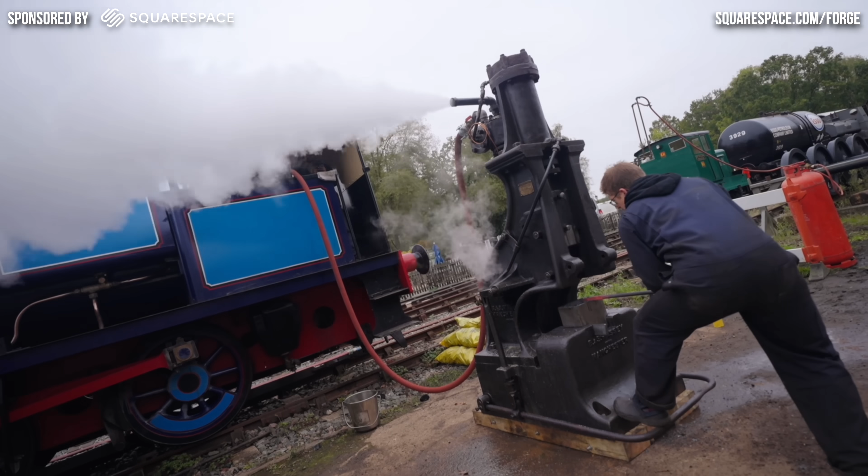It is fabulous to have you here because we're restoring my 1915 Massey power hammer, and in the last episode, absolutely nothing went to plan. We decided that the head that was screwed onto our piston absolutely needed replacing, so I took a big old chunk of metal and made a brand new one to replace it.

We can't install it straight away because there is half a threaded hole on both sides of our piston rod that we will never be able to match up with the correct location on our piston head, so these holes need to be filled up with weld and turned back down, so welding.

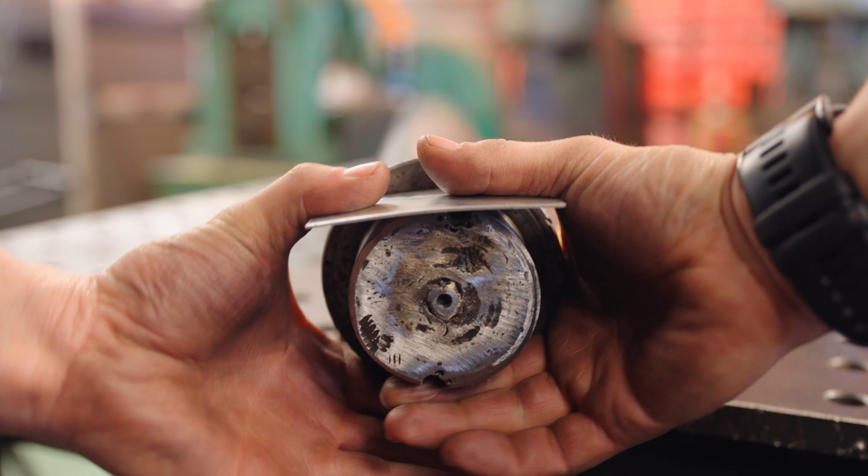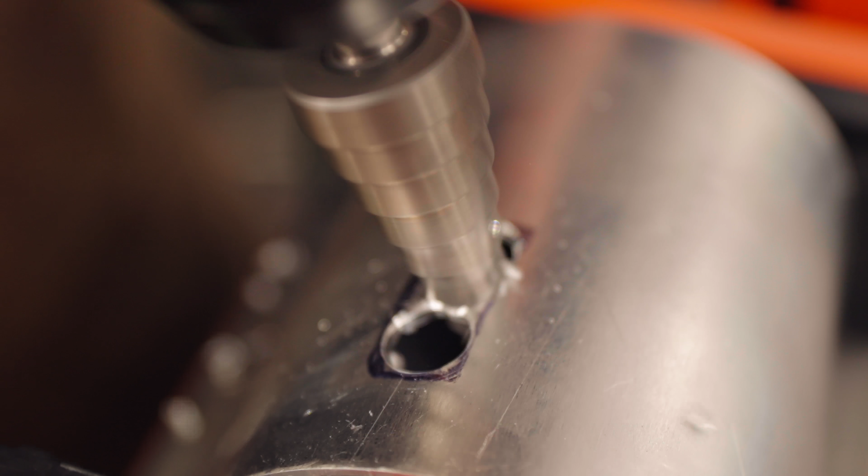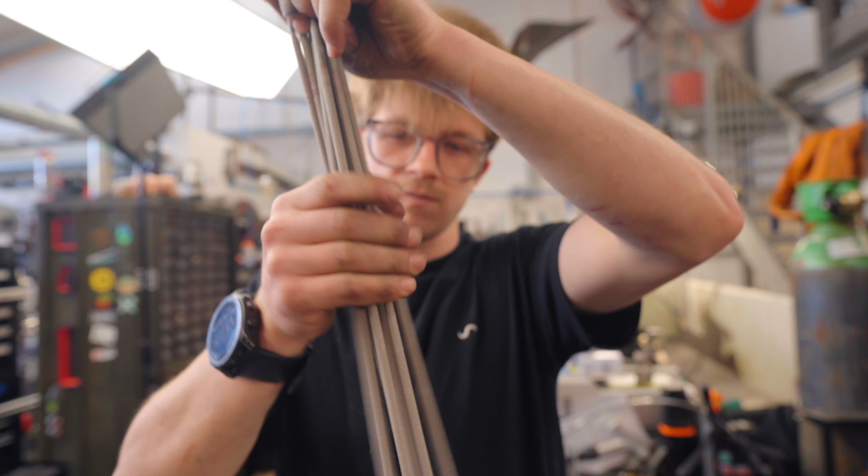Yeah. It's like cooking spaghetti. You gotta prep the rods first. Yeah, you gotta prep the rods. Check on these rods. Good. Man, I like them al dente, but they look a bit stiff. You think they need more time? Been a minute. Do you think we're going to need to tell people that we didn't actually boil the 7018 rods?

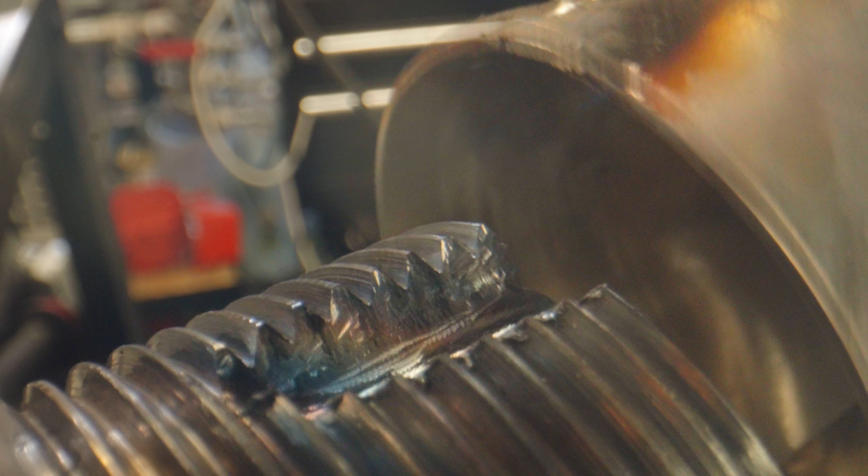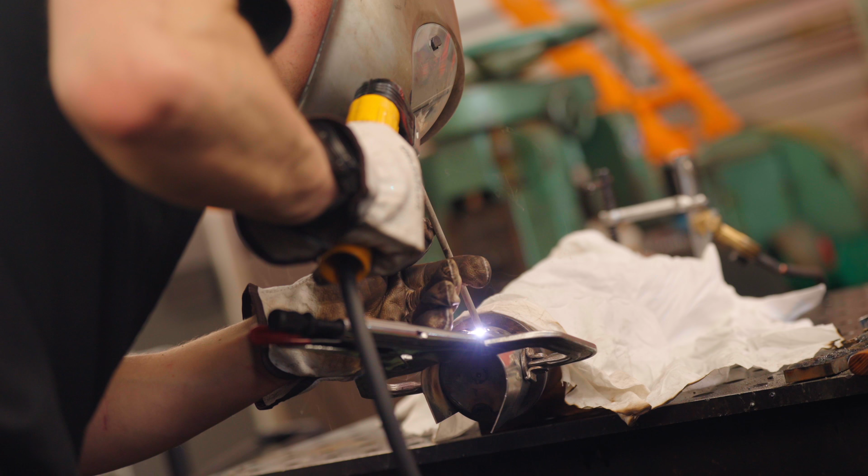So I did all that weld build-up with some 7018 rod. 7018 rod is a rod that's quite susceptible to there being any moisture, so I made sure to bake the moisture out of it, and I made sure to preheat the part to 200 degrees Celsius. We clean it out nice and good with the die grinder. A little bead at a time, peening in between is supposedly the way to avoid some cracking, and what I'm doing now is I'm effectively trying to make it cool down really slowly on the inside of the forge.

One of my big concerns about doing this is we're putting heat into a part that may have a lot of stresses in it, which may mean that we end up with a warped piston, which would be really unfortunate. I tried to keep the heat kind of localized to this far end there. If I come out of this day with a bent rod, I'm gonna be really upset. Hot out the oven.

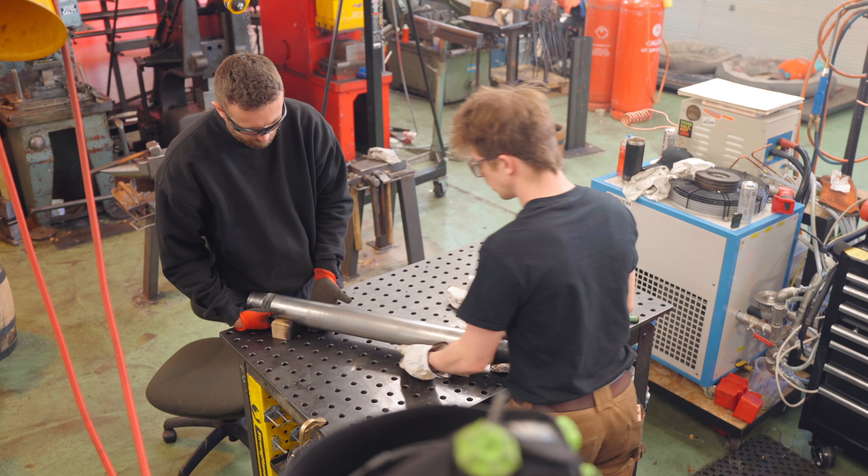That's the maximum depth it'll go. I think this is gonna be the biggest shaft I've ever had to deal with in the lathe. It's a good job you said in the lathe. Oh yeah, no, this is nothing otherwise.

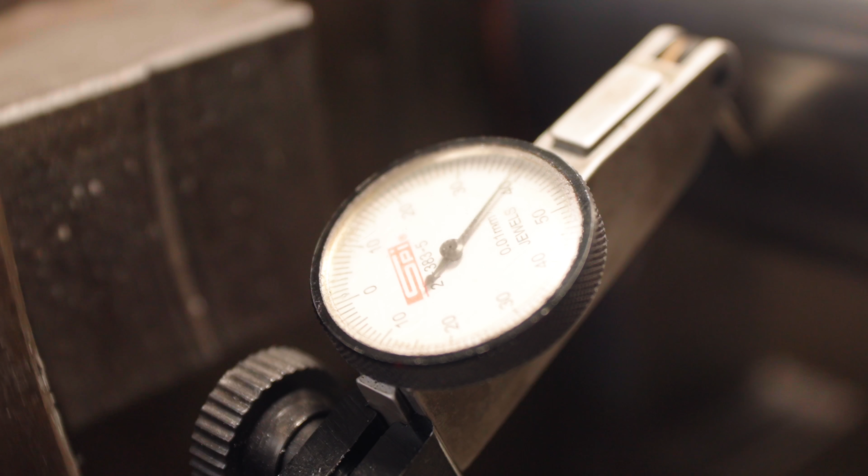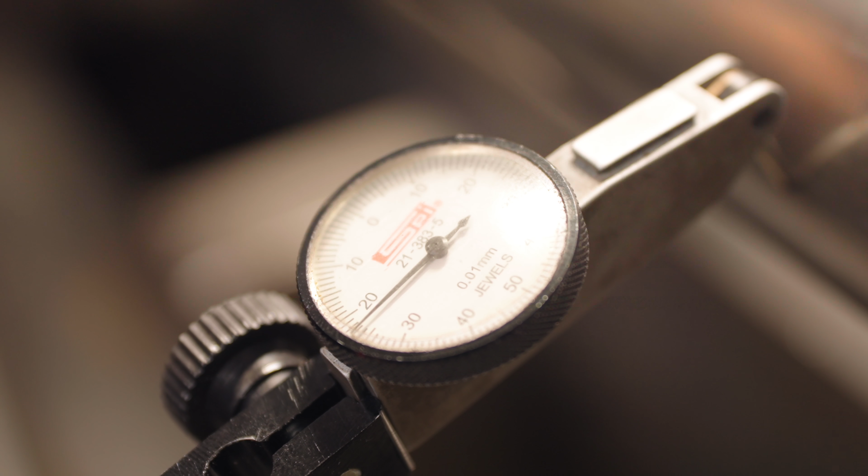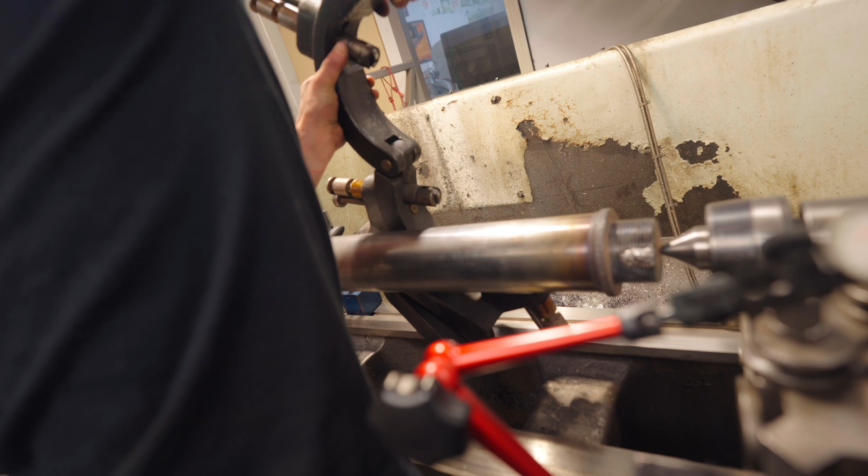Looks pretty good to me. That's pretty nice. Spin it to 50. Now we'll see how that dial moves as we come up. You will see we're obviously not straight by 0.25 of a millimeter. Time to get the big dog out, is it? You know, yeah. What? Oh, Tabby! I really need to put a crane above this lathe. Oh, we're within 0.02 of a millimeter. Let's do this.

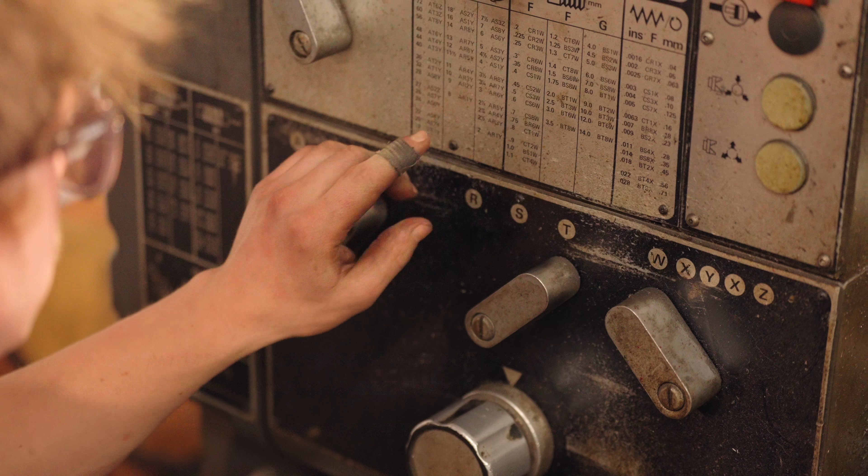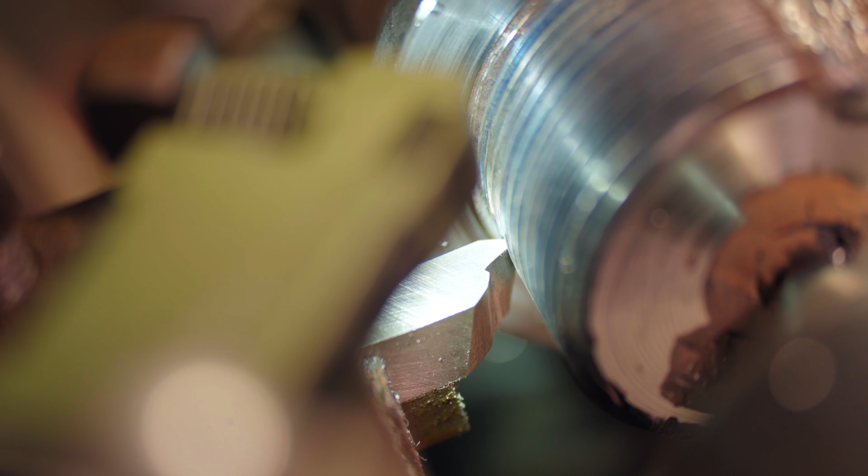There we go. I'm now connected to the lead screw. What we now have to do is get the tool to slot into that groove perfectly. I feed across until we are in the groove proper. Gotta be very careful so I don't crash, because I have to stop this carriage perfectly there. There we go. Now we're getting the technique.

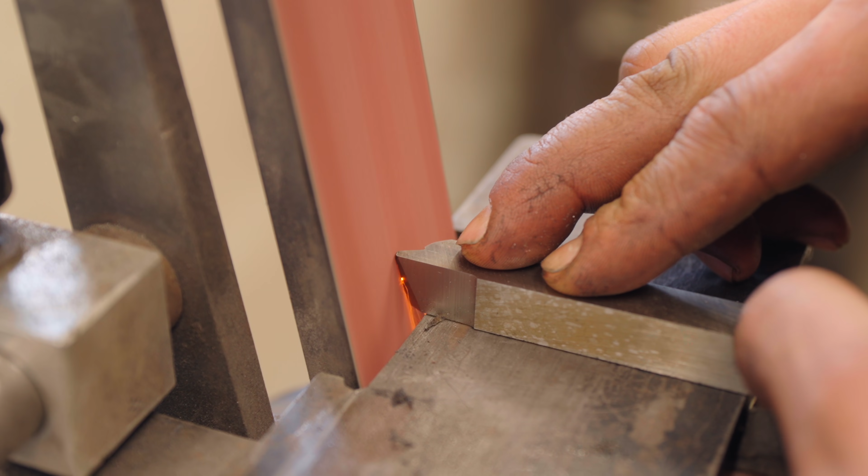We now have a thread cutting tool. We're back in business, boys and girls. Woo, we're cutting now. Broke the tool again. I felt that I was not quite engaged on the lead screw, and so I then bailed. But I think we might be able to try a test fit, so it's perfect timing.

As you can see, that's our welded area that now has threads in it. Yippee! It's now the moment of truth. Will this thread on our repair? And will it go? Oh, yes! Go on. That, with a little more leverage, is gonna seat all the way. High five! Next up, degrease, clean, Loctite, thread it on tightly.

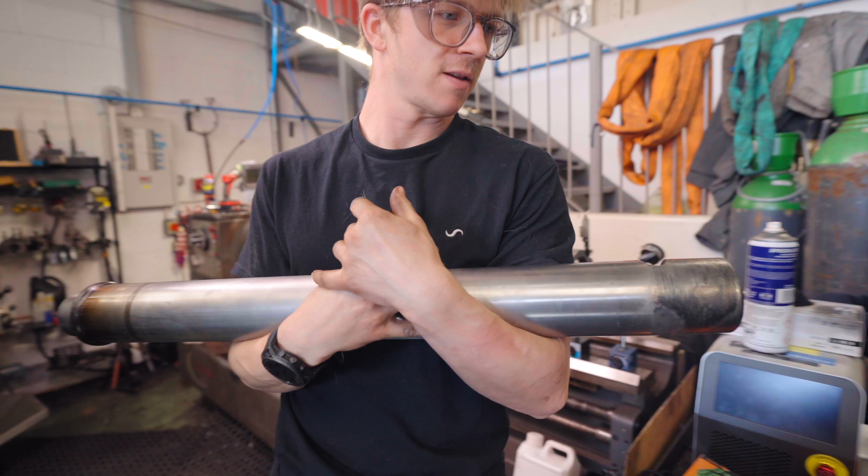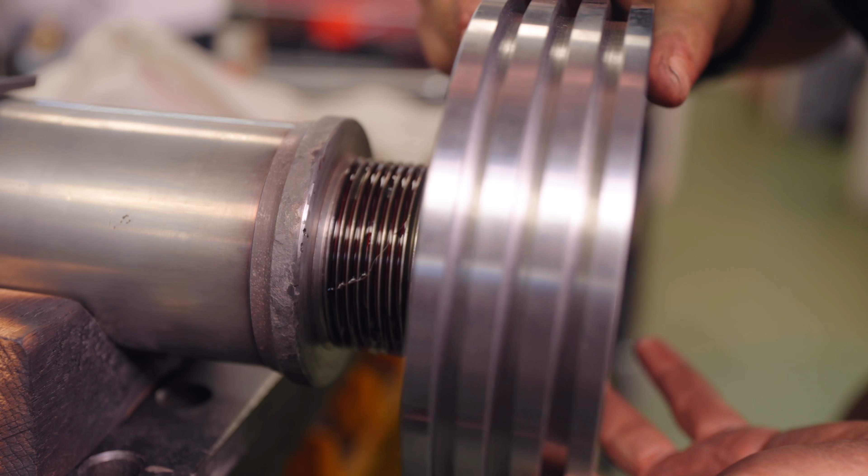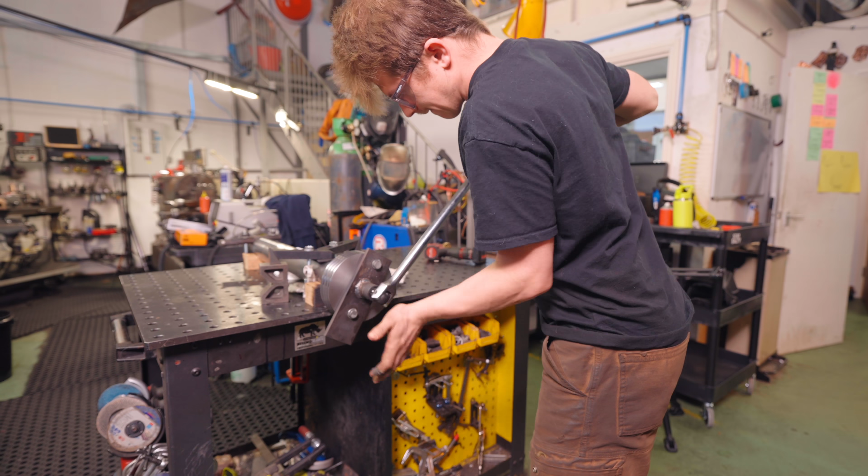Oh my goodness, look what we've done to this plate. We put so much torque on it that we have completely bent that half-inch plate that was firmly bolted to the face. I think we can just about say we've got that as tight as it's gonna go.

Oh, that's why. It's because we were threading it on so far that this was bowing, coming out proud of it. Great news, apart from the fact that it could be that we haven't threaded it as far as it needs to go because we are now running into a little clearance issue. Technically, that's now an interference issue where the end of that piston rod is now hitting our twisty bit.

So what I think I'm gonna do is whack this whole assembly back in the lathe and then face down the end of this rod. It needs to be flush anyway, so that we can hopefully get a little bit more twisting. Obviously, we could make a modification to this, but I know for certain that I do not want this thing to be proud, and so I'm gonna go this route, chuck it in the lathe.

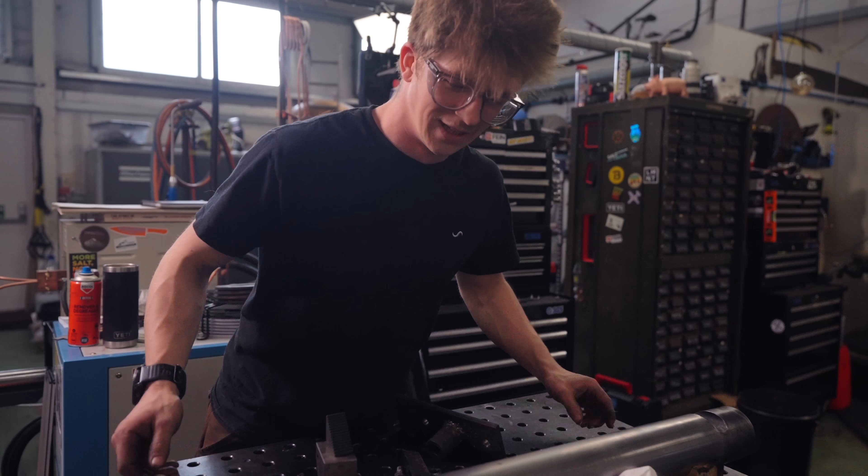But we gotta be quick, because I don't know how long it's gonna be until that Loctite is fully set up. Okay, we just Googled it. Apparently, red Loctite sets in like 10 to 20 minutes. So, oh, for goodness sake, gotta be quick.

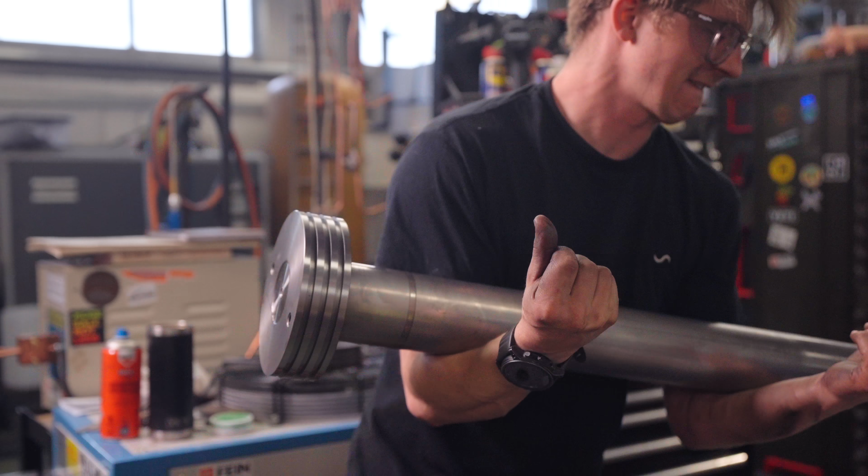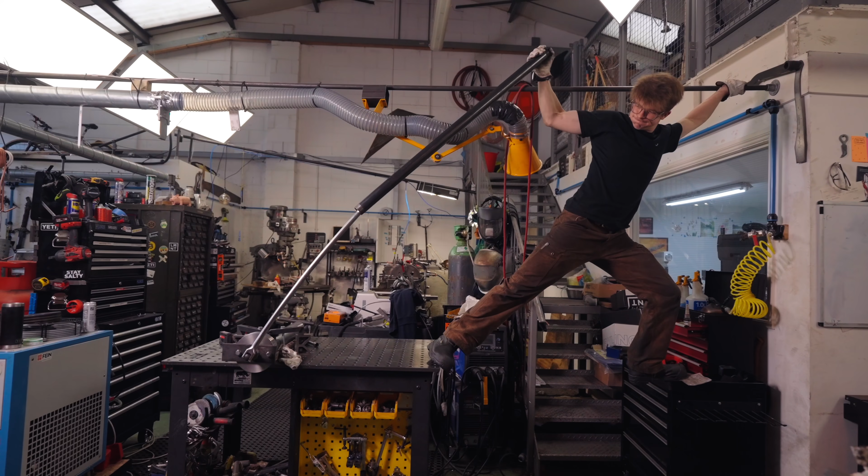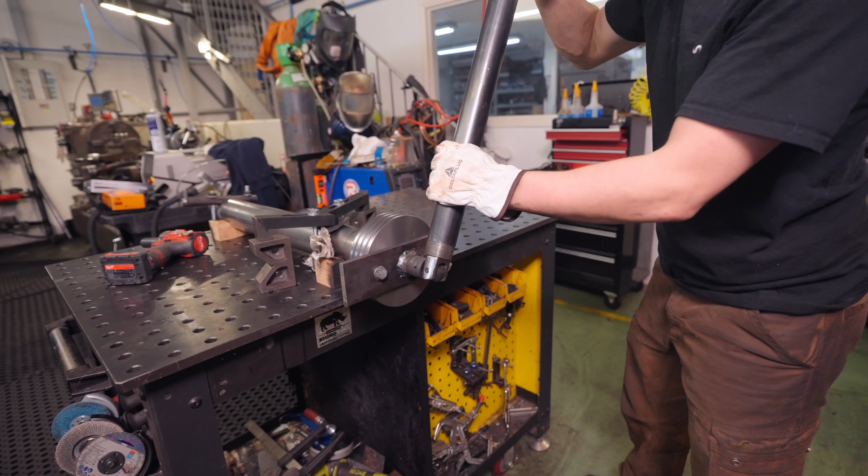I'm begging this thing to not twist. Good, that's promising. Good. There wasn't a rush getting it back into the lathe because we had it as torqued as it can properly be torqued, or the Loctite already set. Anyway, I was about to say this component is done. Oh no, can of worms goes deeper, doesn't it? We cannot forget about the most important part.

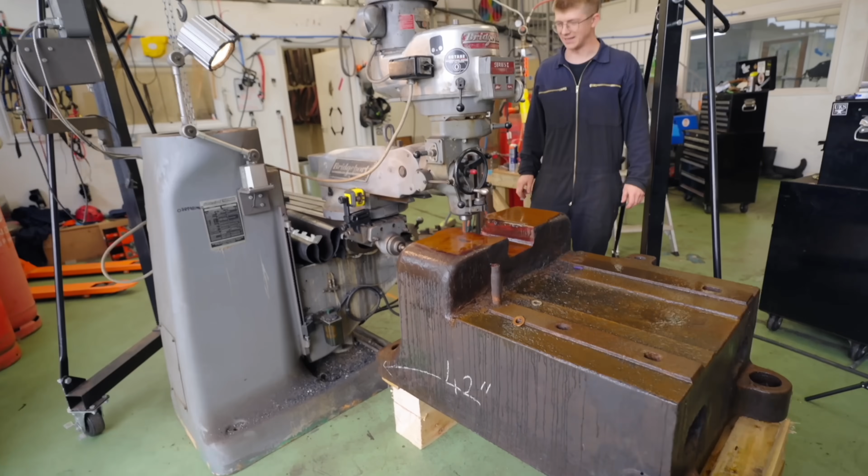Right here is where we welded. We need a locking grub screw tapped and threaded halfway on the shaft, halfway on the piston head. Question is, how on earth are we gonna bloomin' do that? Because that is not gonna fit in the mill without doing some real funky stuff. Not that I'm opposed to doing some funky stuff, but the clock is ever ticking. This hammer's gotta get back together, but it's gotta get back together right.

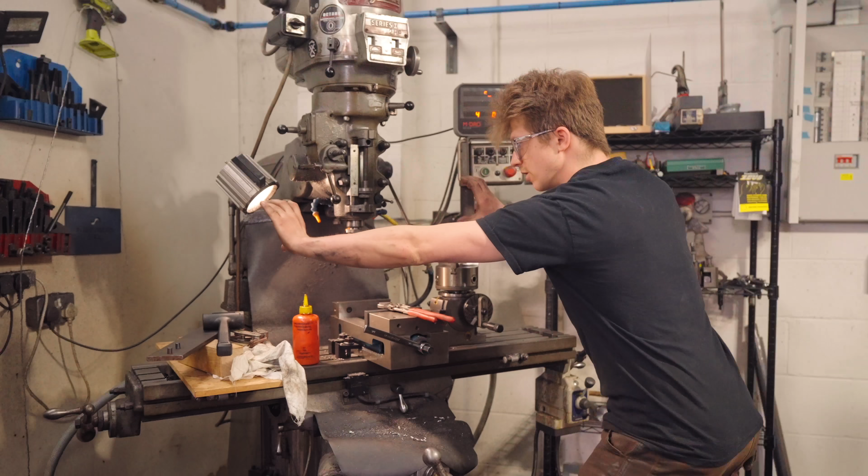Well, option one, we take a hand drill. The trouble with this is we're trying to drill a hole in the middle of two bits of metal that have different hardness. I think there's a good chance that the drill's gonna go off course, and we also know just how straight I can drill a hole is not very. Option two, we can mount that shaft to the side of my Bridgeport table and twist the head around. Option three, we can twist the head of the Bridgeport 90 degrees sideways, mount the shaft horizontally, drill the hole there. Option four, however, what about a mag drill?

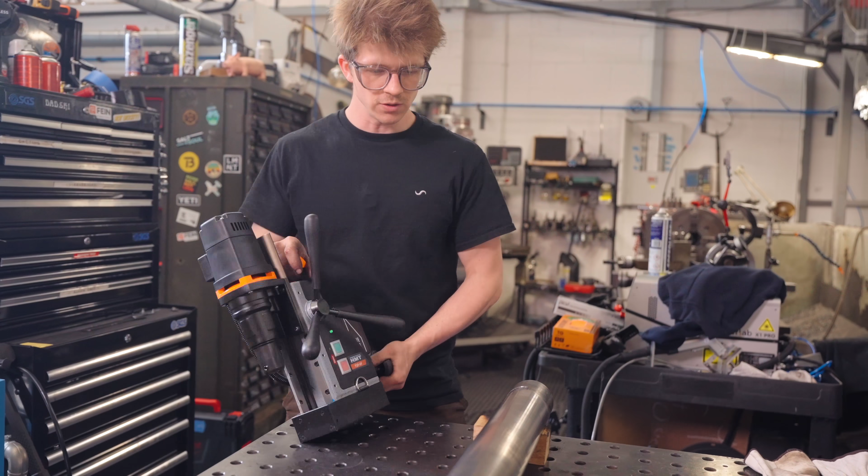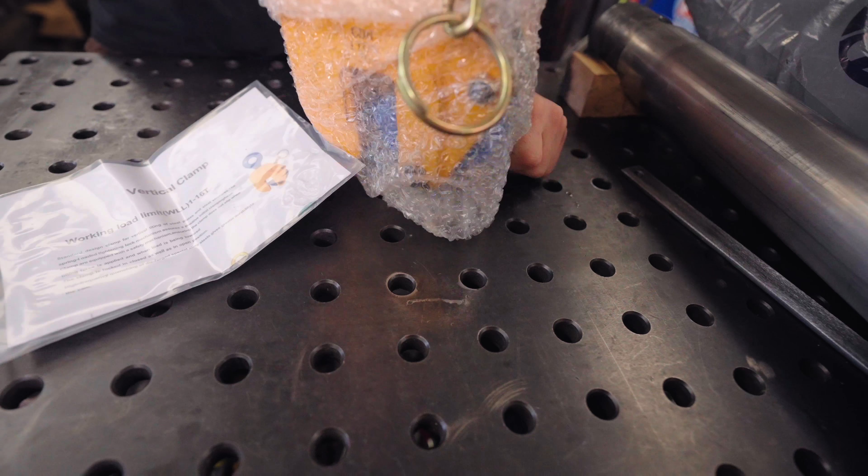And now for another installment of What Has Alec Received in the Mail? Oh, bloody hell. That's a lot bigger than it looked in the pictures. What? That is a plate-holding lifting clamp. Now that we've got a forklift, got to add to the collection. Good to have some of these fellas in stock. Oh, I know what this is. Wow. Ta-da! One Royal Navy battle ensign added to the workshop. What a delightful gift. Thank you so much.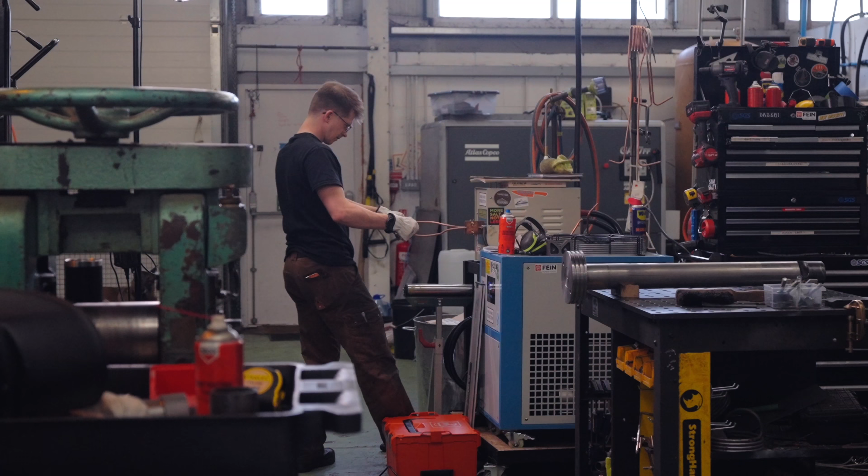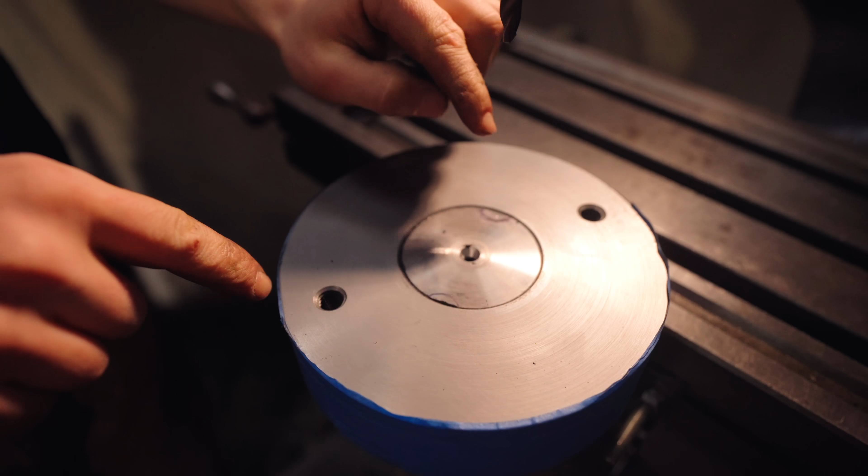So I did a little bit of research about what it is that we're doing, and it turns out this is called a Dutchman, where we are going to use either a pin, or in our case, a grub screw, to act as a mechanical key, stopping the two things from rotating. And it seems like it's quite a common thing to do, actually. Now, on the original part, I obviously had two of them, each 180 degrees from the other. I've decided that in this case, I'm actually only gonna do one.

The reason being, the most important threads in this whole assembly are the threads between the piston rod and the piston head, or the flange. And if I'm putting two Dutchmans in there, I'm going to be doubling the boring away of those threads and the critical friction that they provide. And it means that no matter what, if something bad happens and it comes unthreaded, I have to do a weld repair to be able to make it functional again.

However, if I do just one, it's not like the forces are ever going to be such that it shears a single Dutchman. But too, I've got the opportunity to drill another one in the future if it needs it. Say, for example, with the vibrations, it all of a sudden wants to twist on even more one day. And yeah, that's the reasoning I've got. Don't know if that makes sense. Here we go.

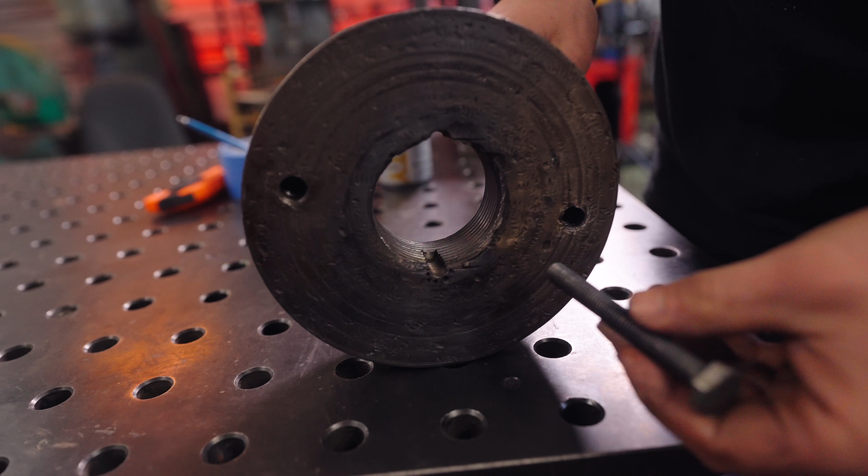There we go. The original Dutchman had an M10 thread in it. We're going to do an M12. The fact that this is threaded to M10 here does actually tell you that that was likely a repair as compared to an original feature of the original part. Remember, hammer built in 1915, all the threads are going to be Whitworth threads. If you find something metric, it's not original.

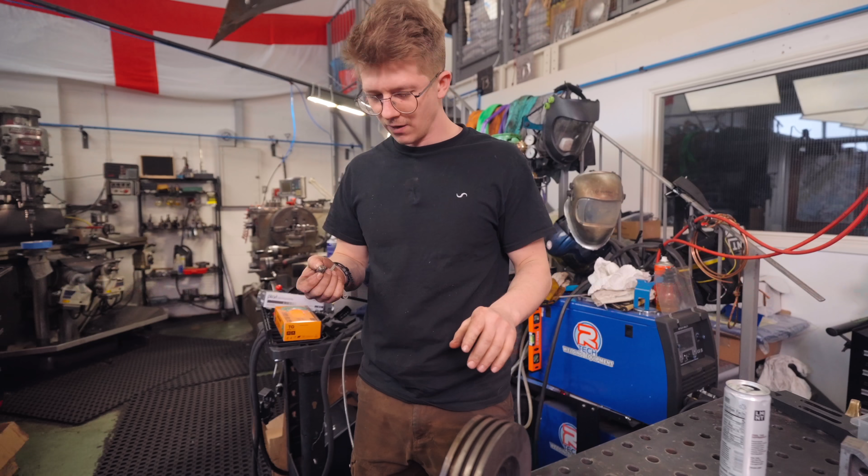On that note, I thought I'd dig out the grub screws that we found rattling around the hammer. Remember these delightful components too. Oh, actually, this is actually quite funny. So some of you guys in the comments had a suggestion that these bits we found rattling around the hammer may have been something like those.

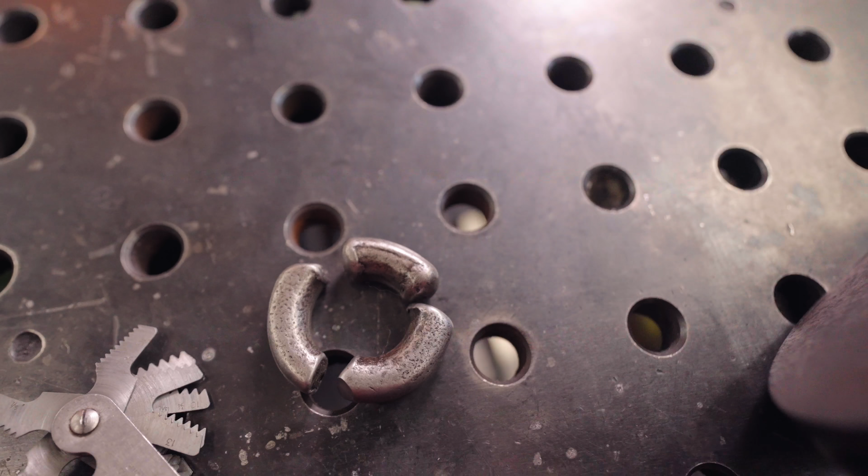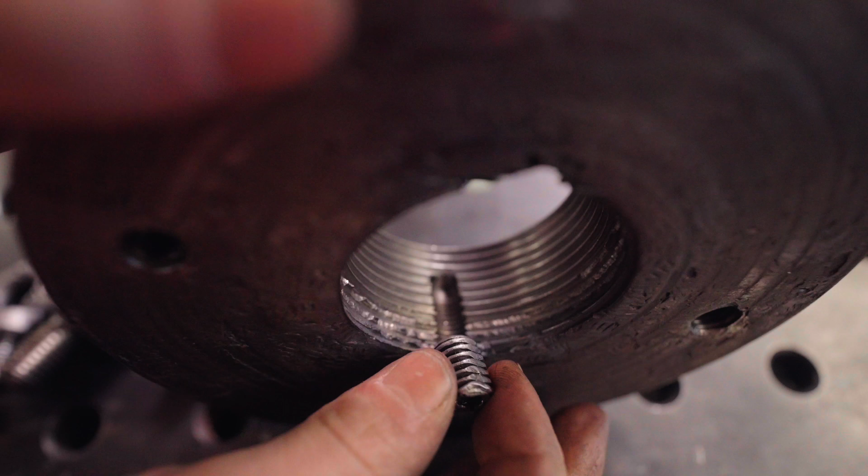A lifting eye that somebody may have threaded into these holes to install the ram and then turned the machine on without removing it, thus breaking these parts. I was just commenting to myself about the fact that this grub screw didn't at all look like the same grub screw as would have been part of the Dutchman, because it's way larger. But what if that grub screw was in fact threaded into there and was in fact the thread of the lifting eye that got broken? Great industrial detective work, mystery solved. Back to our Dutchmans.

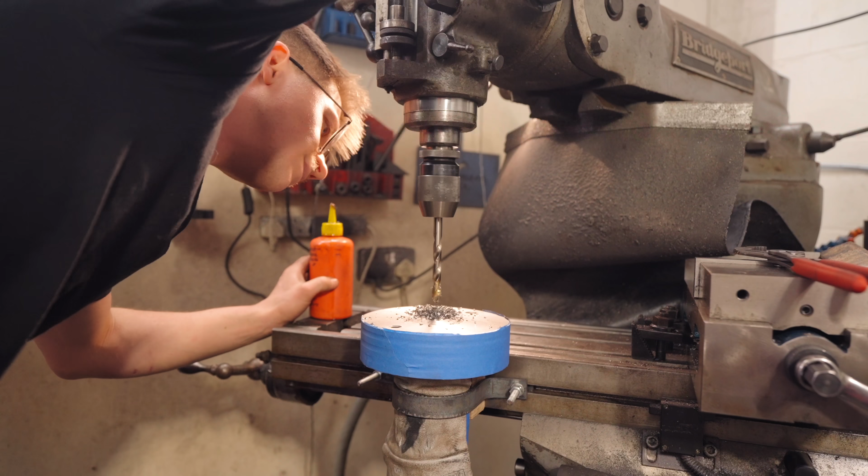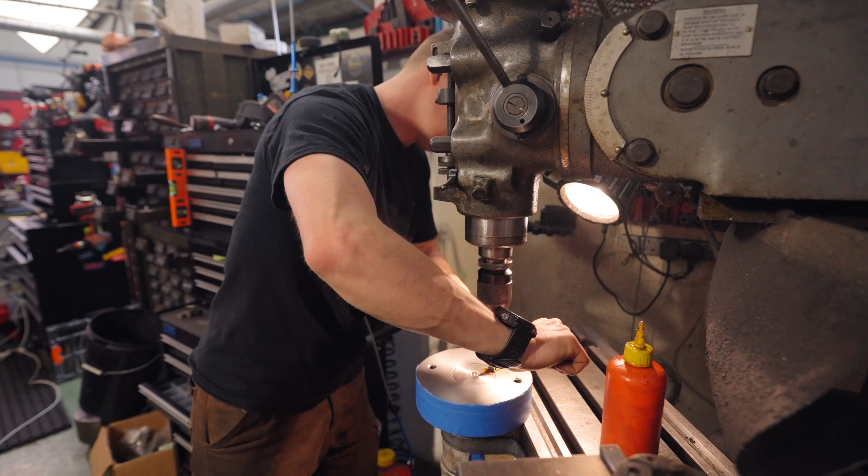Look at that, you can see the cross-section of the threads. Whoa! On the left-hand side is the mild steel piston head. On the right-hand side is the 7018 weld repair on the piston rod. You can see the thread engagement we've got, and you can see that it's maybe a little bit lacking in some of that weld repair area. Started looking into a different world. Finish it off by hand. Oh yeah. The Dutchman's hole is finished. We're just missing the grub screw.

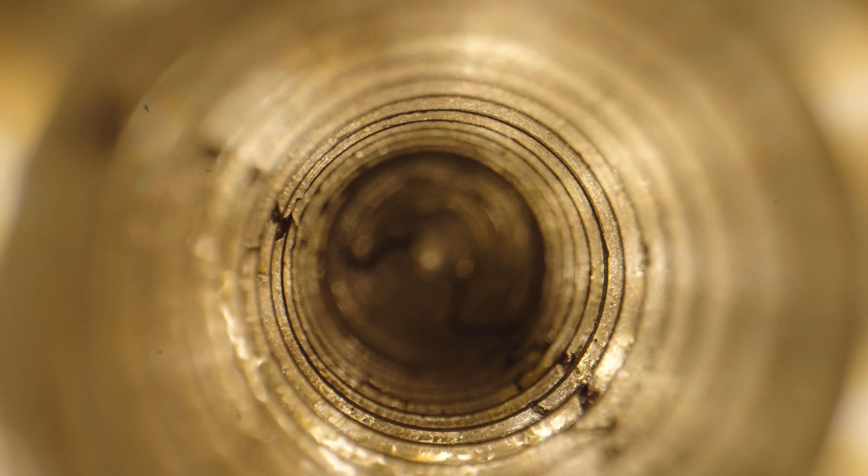Piston rings time. So, we've got one broken piston ring, and then we've got two differently sized piston rings. Definitely got to replace the broken one. I also want to replace the thin one. Maybe we won't have to replace this correct 6mm piston ring, but I'm going to try and make 3 anyway. So this is what we're going to use. Now that is not just any old bit of steel tubing. No, this is actually very, very special.

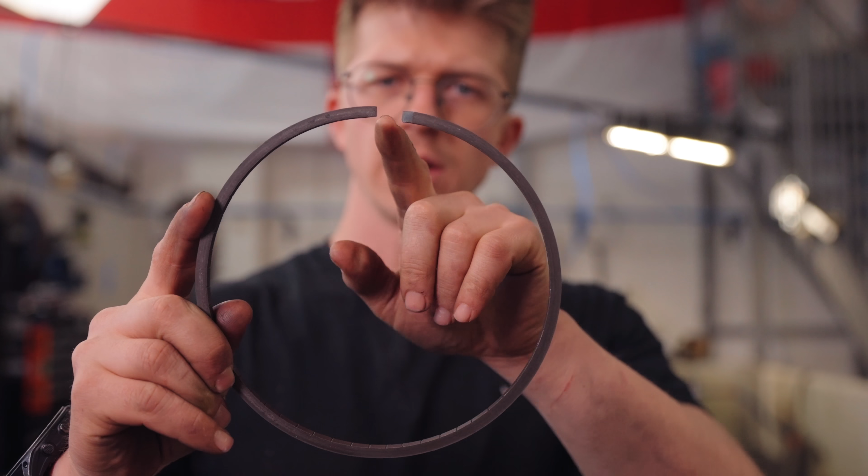You see, as we all know now, cast iron is a fabulously lubricitous material, which means for the task that our piston rings need to be up for, it's perfect. See, the piston rings we make are what is actually going to create a seal on the bore of our power hammer. Notice how there is a gap there. Well, when this is sprung into the bore of our cylinder, like so, that ring is applying pressure on the walls of this bore, and that is allowing it to seal.

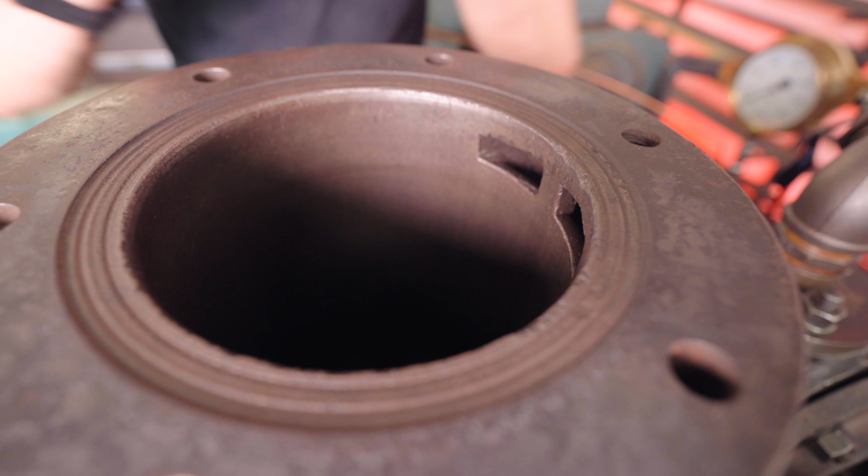Making a piston ring isn't as simple as getting a bit of square bar and bending it in a circle. It is an incredibly precise bit of engineering. In its closed state, when made, it needs to be a ring with a diameter that matches the diameter of our bore. Then, once we've made that perfect, we are going to cut it, split it, stretch it open, and heat set it so that when it's then compressed into its final bore diameter, it's applying some outwards pressure. I've done enough research to figure out this is a proper project. Learned a lot from some of the guys on YouTube, like Mr. Crispin, so let's get to it.

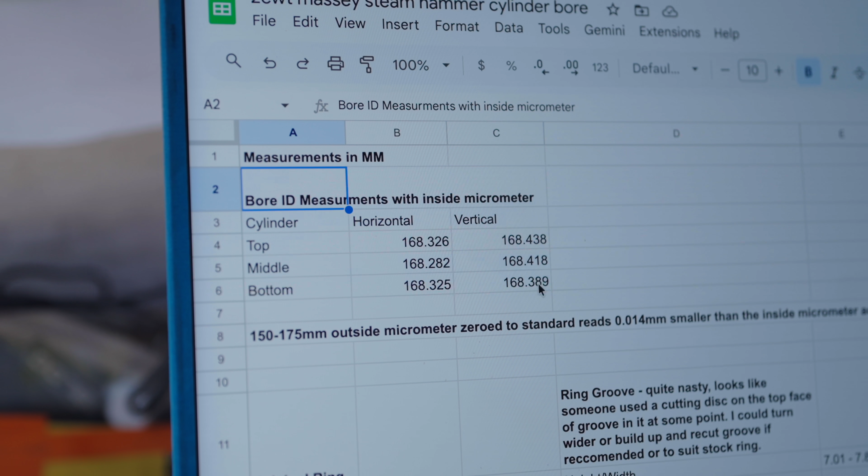These are our bore measurements. It's a little bit ovalized. We're going to work to the largest diameter. And as you can see, that is a little bit proud by 0.5 millimeter of the diameter of our piston head. Again, that's because it is the rings that are contacting the bore, hopefully not ever the piston head. Finito. Let's go ahead and print that. There we go, and modern printers. Quick sanity check. It goes, woohoo!

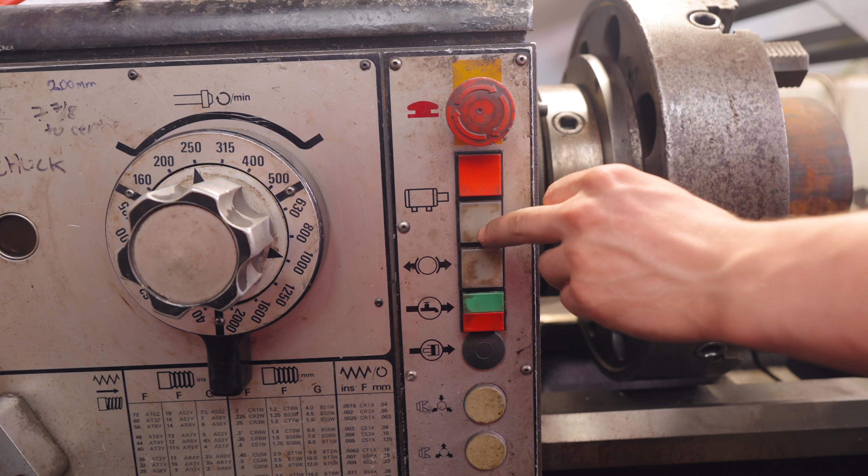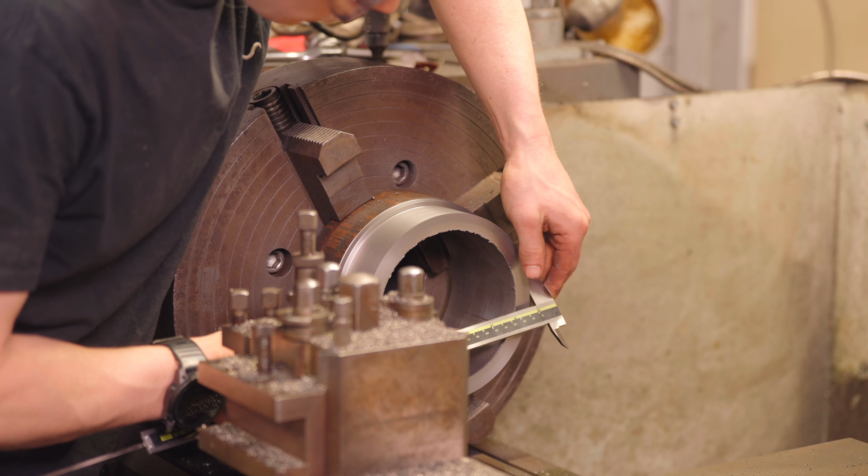Okay. We are 0.4 millimeters away from exactly where we need to be. That's about 15 thousandths of an inch. I'm not going to go any further until we get the inside bore to dimension. The theory being, if there's any sort of weird stresses that go different once I bore out the inside, if the dimensions then change, we'll have that margin to skim it back down before we get the tool post grinder on it.

So now it's time to make that joke again. That joke that we all know. Frankly, it's getting a bit boring.

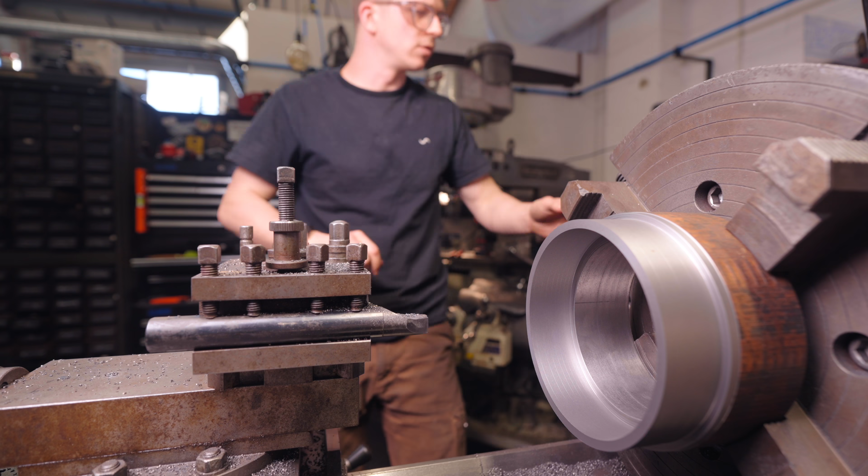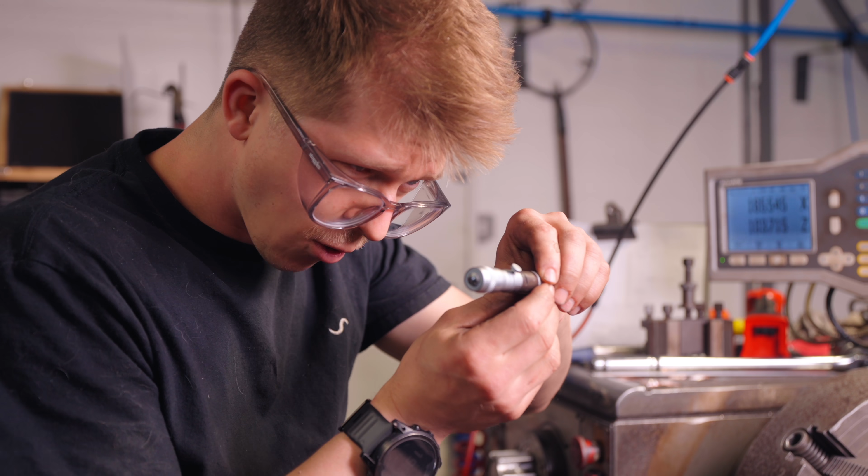Now starting to get into accurate measuring territory. 155.145. Almost there. Come on. Make this the most accurate bore you've ever done, Alec. 157.04. Thousandths of a millimeter larger than I was hoping. I wanted 157.02, I got 157.04. Maybe we just measure it again. Maybe I gripped it too tight. Do the hokey pokey. That's what it's all about.

157.03. I was aiming for 157.02. We are one smidge, technical term for 10 microns, above that. But you'll note that isn't the same number that's on our actual drawing. It's 0.1 millimeters smaller. More on that later.

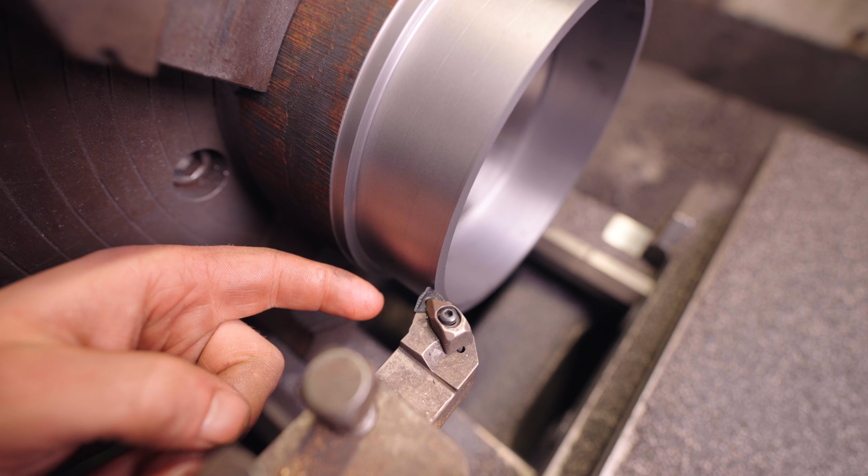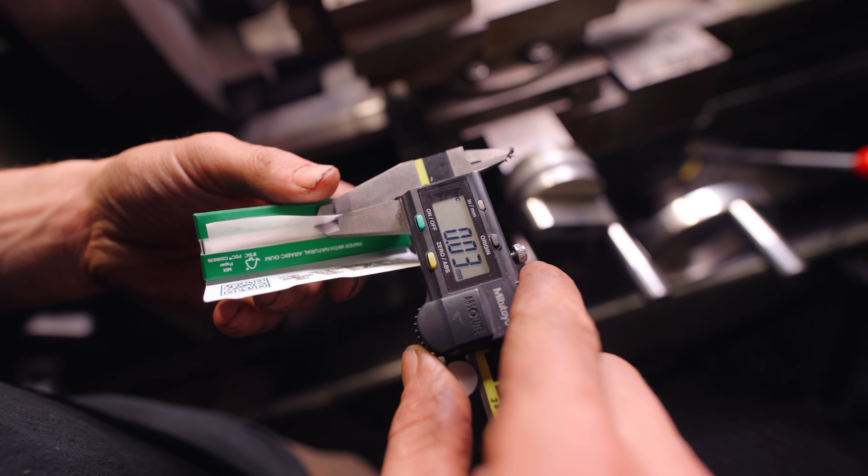Now change tooling so that we can finish turn the OD. Got to figure out where that tool is though. So, have a look at this. Bring in the tool while we give that a wiggle. When it stops wiggling, we know where we are. There we go. Cigarette paper is 30 microns. So then simple maths to account for that increase on the radius. Plug it into the DRO. We know where we are.

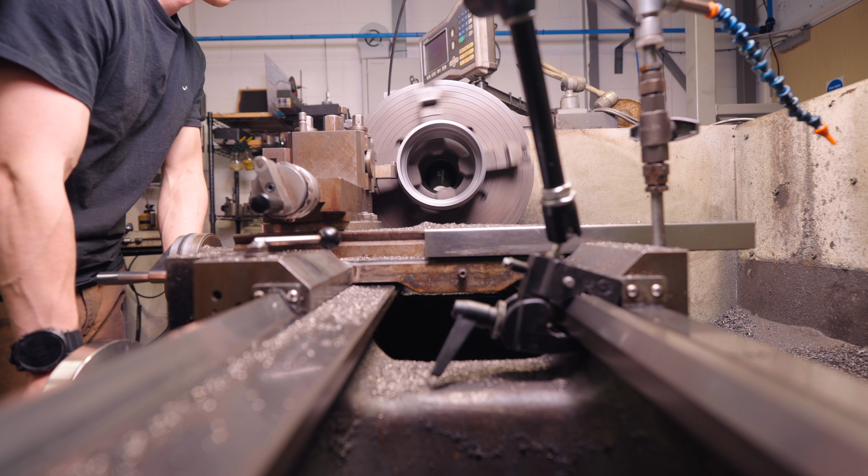156.58, perfect. Le moment de vérité. Fantastic. 168.52. We're on the money. Look at that, outstanding. Parting tool is in. We're gonna make our first ring. I've allowed 1/1000th of an inch of extra thickness that we can hopefully sand off and make flat.

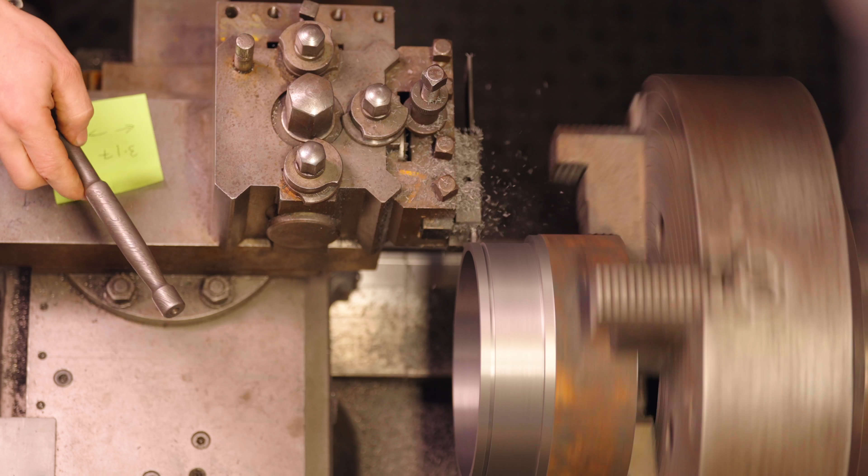Woohoo! Yeah, baby! That's our first ring. Yes, we're on the money. This should be a little bit too snug in the piston ring groove. Oh, yes! Giving us just a little bit to sand down. 3 more to go. I'm making sure that we have spare, just in case.

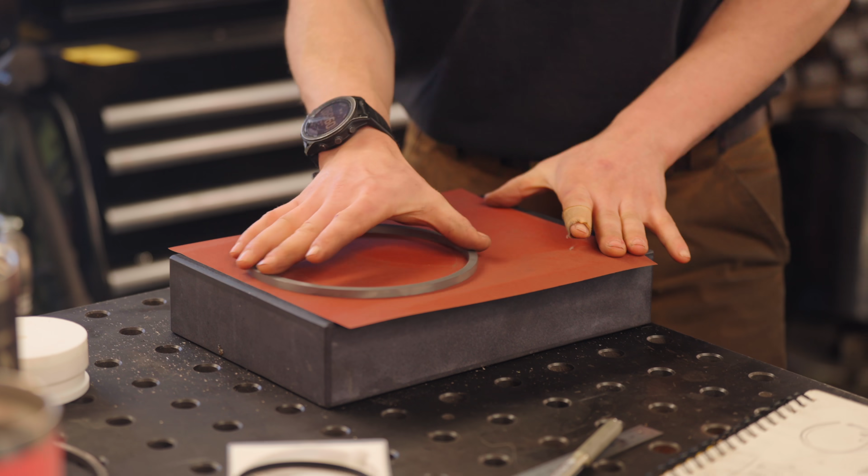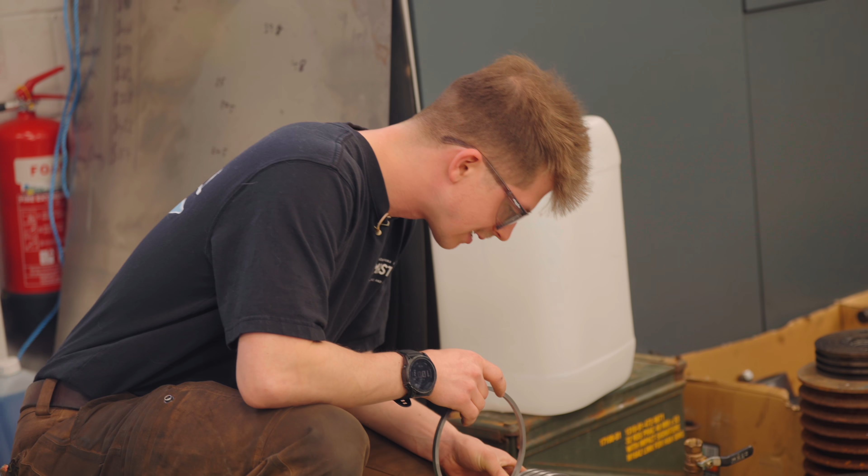Just so I can sanity check my allowances, I'm giving it a gentle sand. Make sure it can fit in to the groove as it's meant to. Yeah, I think I've made them a bit too tight. That's gonna take too much sanding time to get down. So we're gonna take a smidge less on the next little slice. Perfection.

Here are our 4 rings. These 3 have a perfect width to them. We of course still need to take some material off our thick one though. Hopefully this doesn't take too long. Otherwise we're gonna have to go set up the surface grinder to make this happen. To put into context how much material we need to remove, the material that we have to remove is almost identical to the thickness of cigarette paper.

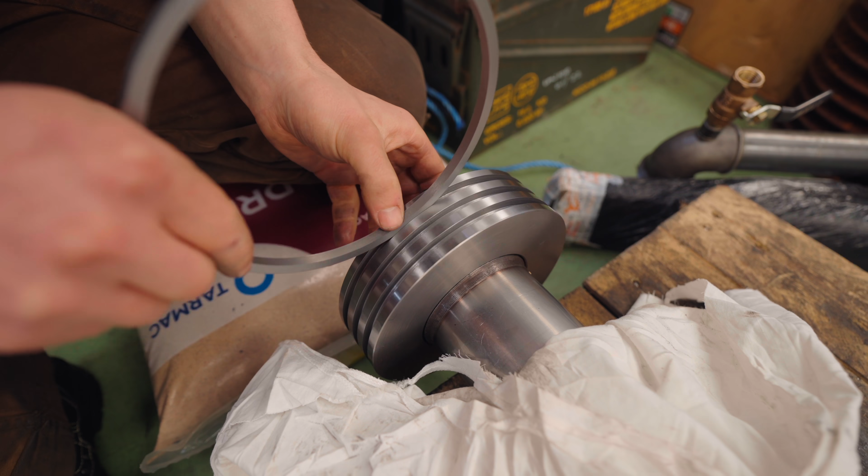Conceive of that. This is why precision is so exciting, and it's part of why I'm just absolutely having a ball on this project, because we are diving into precision and I'm having to really learn about it. But imagine this, the difference between the type of fit that is correct and the type of fit that is not is 1 cigarette paper. Okay, 6.05. That's what we're aiming for. Yep, perfect. That's the type of fit. Make sure there's no burrs.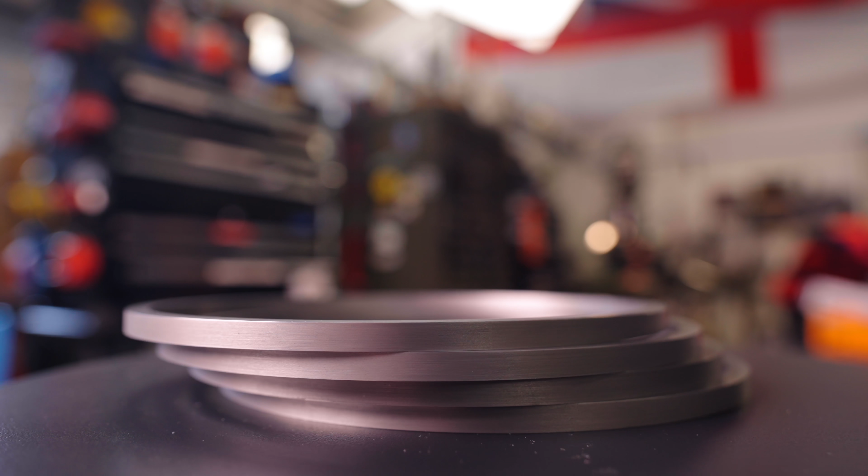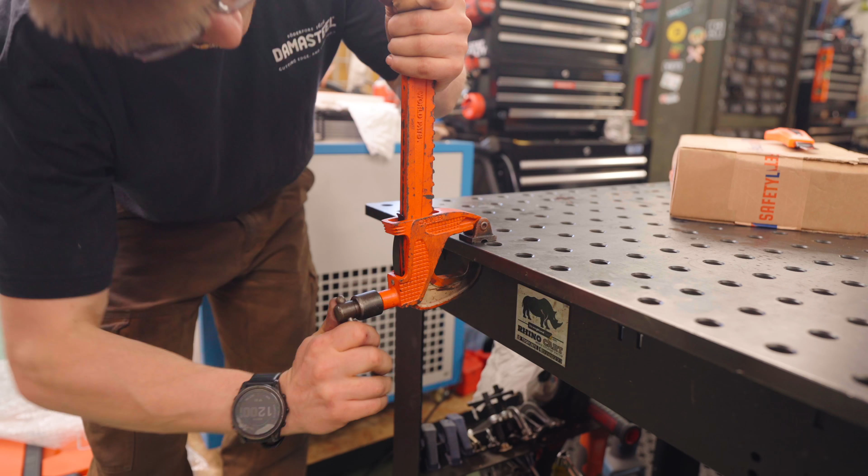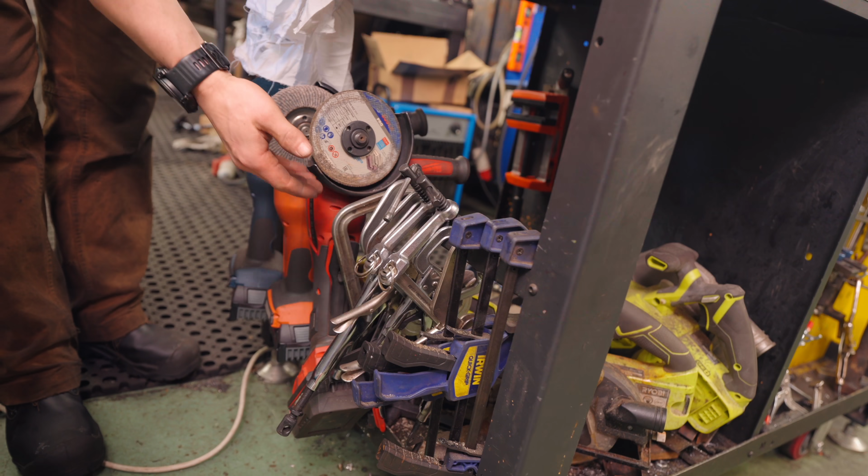As delightful as precision is, sometimes one does need a breather. Let's unbox what I bought on eBay. Ooh, yes. Oh, that is a Carver clamp. Apparently, these are meant to be the bee's knees. A really heavy-duty welder's clamp. Unfortunately, my clamp supply here in the workshop is abysmal. In the Montana workshop, we had a fabulous array of clamps that Jason at Fireball Tools gave us. Here, this is my sorry collection. I have not been investing in the workshop enough over the years, and as much as it hurts the pocketbook, as I think you can tell, I've been investing a little bit more in it over the past few months.

Oh, how sweet. We even got a little baby offspring Carver clamp. Thrilling. I think I've even got a couple more on the way. How funny is that? Swivel hook so we can make an attachment for the forklift. Ta-da! Looks in decent nick. By the way, if you've got big fat spare clamps, let me know, I might buy them from you.

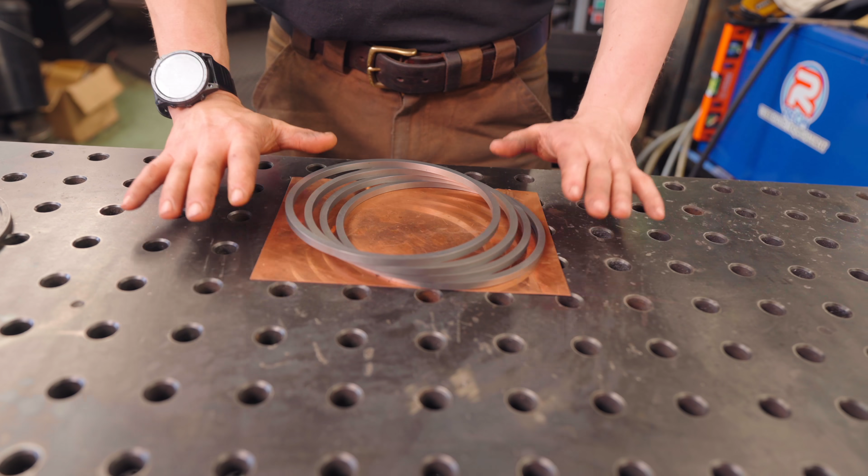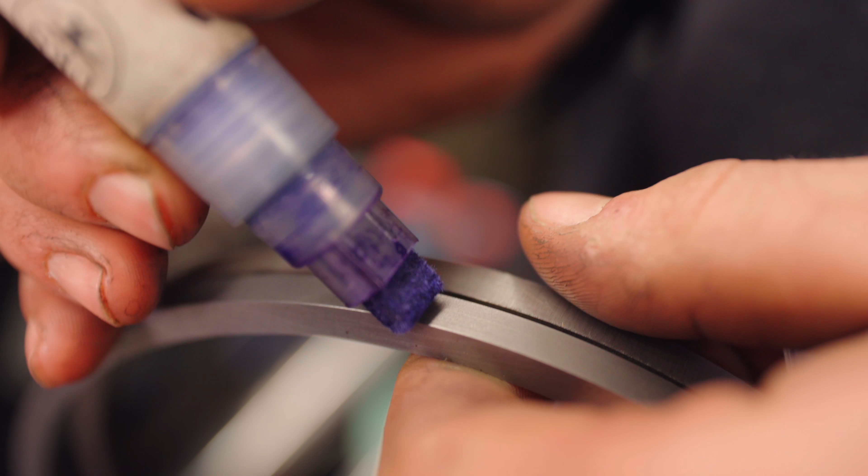All right, the next step is splitting the rings. It doesn't do the job it's meant to do if it's not split. Let's figure out how to make our cut. Unfortunately, I don't have a slitting saw. That would probably be the better way to get it done, so we're gonna have to see what we can come up with. Jeweler's saw is the thinnest saw I've got in here at 1/3 of a millimeter. Let's see what nonsense we can come up with. Oh, ha! Straight to it with the nonsense.

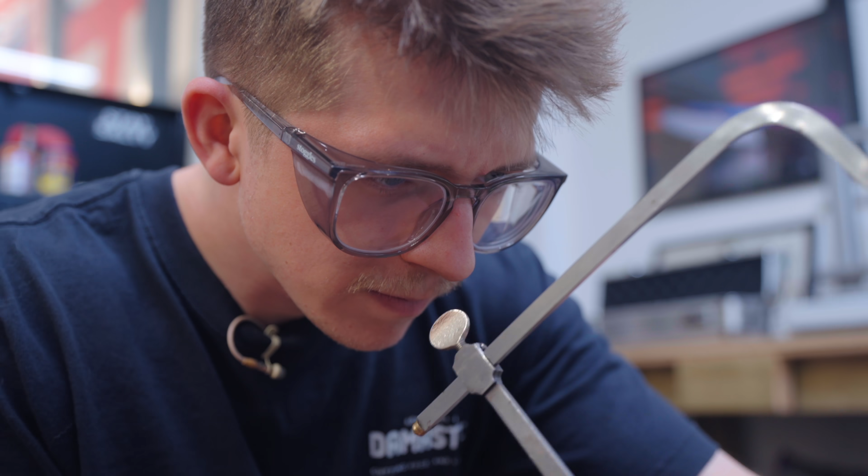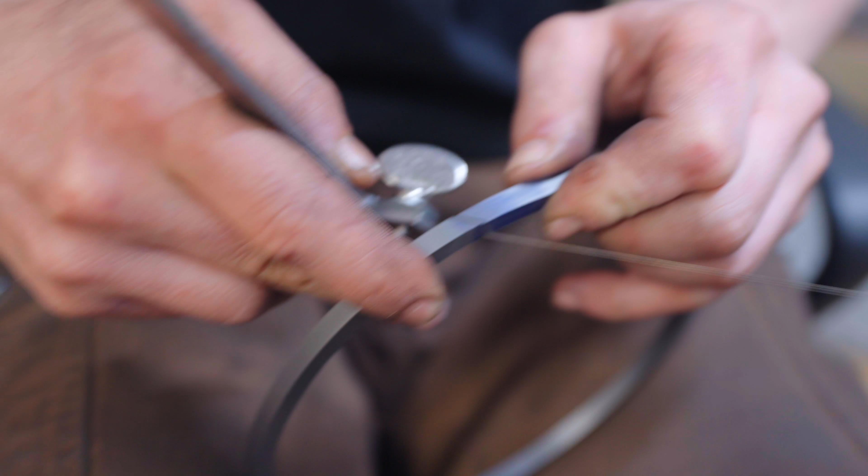I'm interested to see what's going to happen when we pop through. Is it just going to explode? Is it going to stay where it is? Is it going to pop inwards more? A real adventure. Woo! We're through! Yay! And that's fascinating though, it actually went in more. The blade's 1/3 of a millimeter thick, about 13 thou, but there is no kerf because it is actually snapped in. God, look how flexible it is. I can open it up really easily. Whoa! Don't snap. 3 more to go.

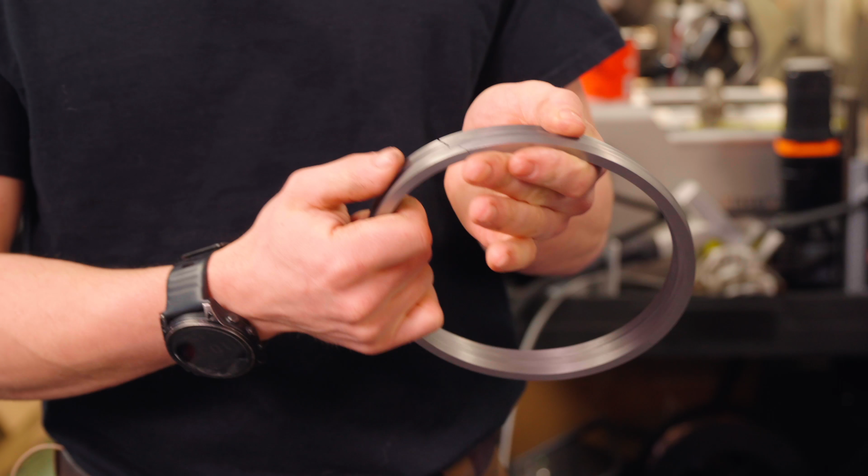There we go. The piston rings have been turned, split, which is great, but they need to be expanded so that they can apply their correct spring pressure in the bore when it's all said and done. Okay, here's the thing. I just got back from Weekend Maker Central. I had a fabulous time meeting some of the viewers of the channel, which is awesome.

But while I was there, I had some really interesting conversations about the steam hammer restoration, and I was chatting away, describing the piston rings that I've been making out of cast iron, and: what, you're making them out of cast iron, Alec? Yeah. You know, like steam engines, steam locomotives, they've all got cast iron piston rings, lubricity, right? Oh, what? For the hitting piston? Oh no, they're steel. What? Yeah, they're steel. Well, think of the G-forces on impact, Alec. Cast iron, it just breaks.

What? Yeah, it's normal in Massey power hammers, like Massey clear space power hammers. Yeah, they're all steel piston rings. So yeah, they'll be steel in your hammer. What? You know, it's tough here, guys, right? Because in doing my research on this project, finding out information about a steam power hammer is too niche to be able to get the info.

So I'm doing a lot of research as if it's just like a steam locomotive or a steam traction engine. That's the main context through which we're looking at this. And the potential fatal flaw of that is not recognizing the ways that this steam power hammer is different to steam engines. Steam engine piston goes up and down the cylinder, experiencing some G-force at the end of the stroke as it decelerates and then changes directions, but it's nothing like a power hammer.

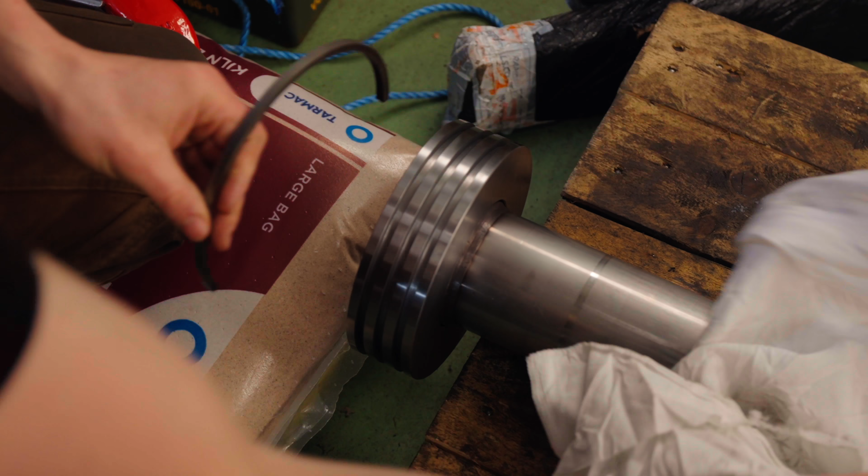When this ram is traveling up and down 240 times a minute, and it is impacting a bit of steel, decelerating in 0.5 millimeter from quite an incredible rate of speed, it means that all the components inside here, did a little rough calculation, they could be experiencing upwards of 700 Gs, which means that the piston ring within these grooves, even though there's only 0.1 of a millimeter of clearance there, it is decelerating and slamming into one side of that groove wall with an incredible amount of force.

And so, when the most knowledgeable person in the world about Massey power hammers, John Nicholson, point blank tells me that these are probably steel piston rings, and they probably want to be steel piston rings, and you think about all these other reasons why you might not choose cast iron for a piston ring, you start to feel like a bit of a silly Billy. The unfortunate thing is I found this out 36 hours after having made my cast iron piston rings.

And so with this new information, my plan of attack is as follows. I need to have a look at our original piston rings. We need to determine were they cast iron or were they not. There is still a chance that these are cast iron, and there is still a chance that it will be fine. If these are cast iron, I can keep moving forwards, because if we got 100 years out of one before one broke, it's gonna make me feel pretty confident to carry on with our cast iron ones. But if it turns out that we can determine the original piston rings were in fact steel, I'm gonna have to start over again. So here's what we've got.

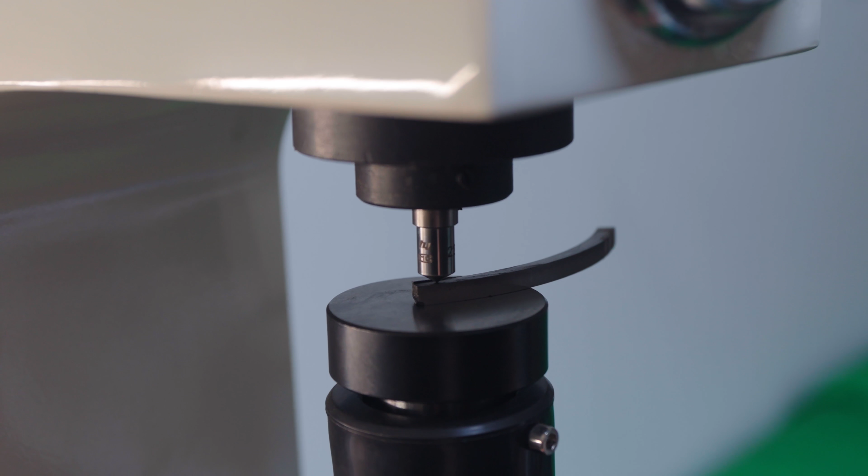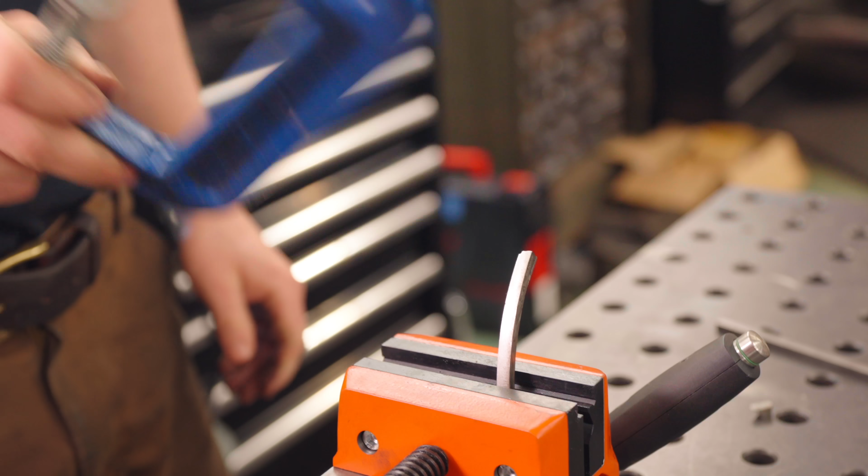Not that we need any more confirmation, but we can further confirm if this is steel by hardness testing it. Okay, 20 Rockwell C. Cast iron is 0 Rockwell C. Final test, not that we need any more confirmation. Yeah, you see, cast iron would not bend like that before it breaks. Now my freshly turned cast iron ring. Yep.